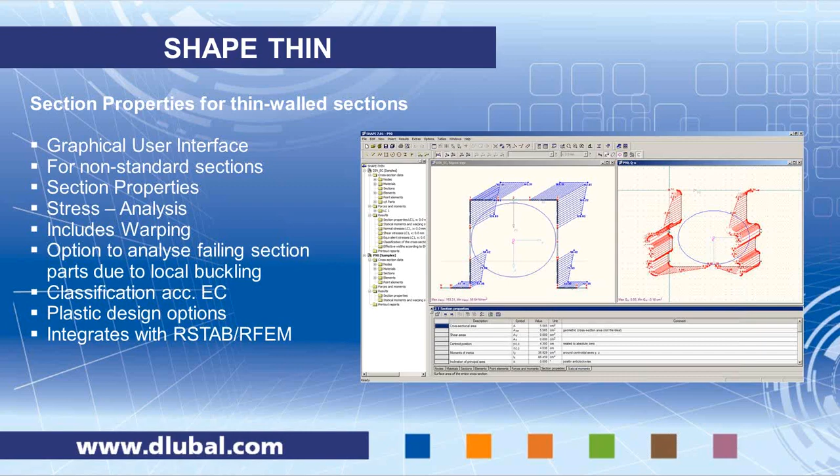It also comes with a classification according to Eurocode for general cross-sections, and it has plastic design options. It's also capable of importing internal forces from RSTAB or RFEM, or you can, as you like, manually enter some internal forces. We will see this module live, presented by Chelsea in a few minutes.

The second module that we are going to take a look at is RF-FE-LTB. It is meant to do buckling and lateral torsional buckling analysis according to second order theory. It's made from a 7 degree of freedom 1D finite element, which includes warping moments.

In general, you find in the codes procedures how to check for stability for standard sections, like an I-section, but once it comes to a general section, there are not many regulations that you can use.

In general, you have to use a program like RF-FE-LTB, where you can also set loads eccentrically, and that includes the 7th degree of freedom, the warping degree of freedom. With an imperfection and a second order theory analysis, and a stress analysis at the end, you can check for the allowable or limiting stress, and whether the critical load factor is smaller or larger than 1.

As I said, it works for all kinds of sections. It allows you to place loads eccentrically. Also, it has the option to stabilize the section eccentrically, so you can arrange a support or a spring along the top flange, for example. And it does stability and stress analysis. We will also take a look at this module live.

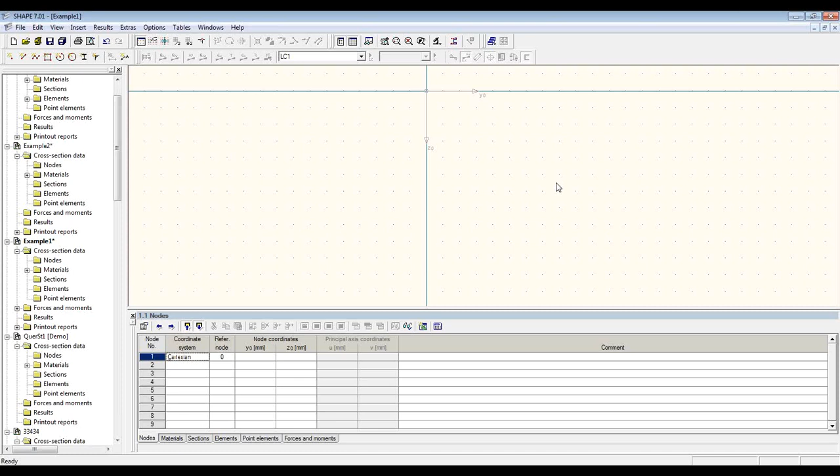The layout of the program is similar to RFEM in that you have a graphical window and workspace. Below that are tables. To the left here we have a navigator, and at the top there is a toolbar with several tools for modeling and also for displaying the results.

So in ShapeThin, when you are creating a new file, you have some options here in this dialog box. First, you define the name of the section, which is also the file name, and you can also add a description, which will appear in the heading of the printout report.

Below here, you can see some options for calculation. Here you can define if you would like plastic section properties to be determined. You can also perform plastic design, check limiting ratios according to DIN, and check or analyze effective cross-sections. To the right is an option where you can define the direction of the global coordinate axis.

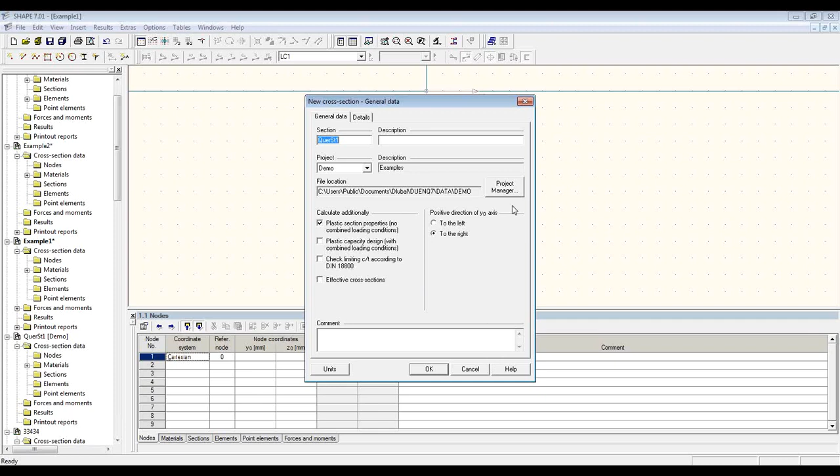Okay, one last thing before I start with my example, I'd like to take a quick look at the project manager. This comes with ShapeThin and is a nice way to quickly access and organize all of your files and previous sections that you've created. Here is a preview of my first example I will be creating, and here's a preview of the second one, so keep that in mind.

Getting started here, my first example will demonstrate one of the ways you can create sections in this program. I'll be making a built-up column section out of standard I sections and then modifying them. I will be creating an opening and modeling some welds.

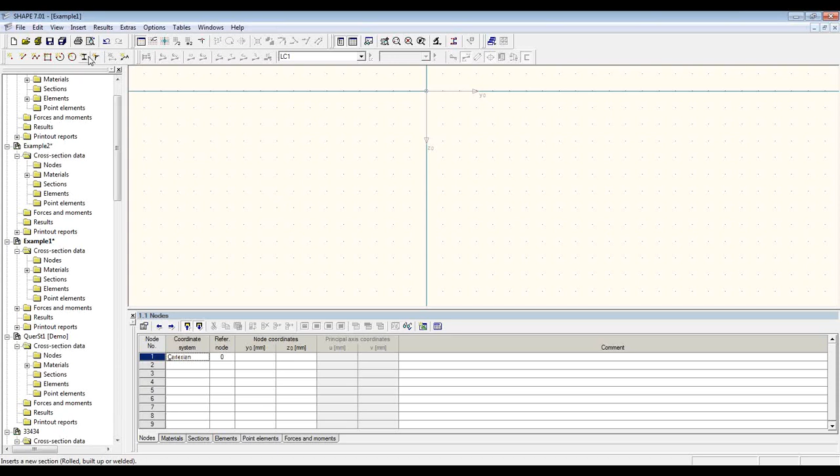First, I'll go ahead from the toolbar and open up the cross-section library, and here I can choose my I section for the first part of this. I'm going to take an IPE 500. This dialog box that appears is what facilitates placing the section. Since this is my first one, I can just go ahead and place it so that the top flange is at the center ordinate.

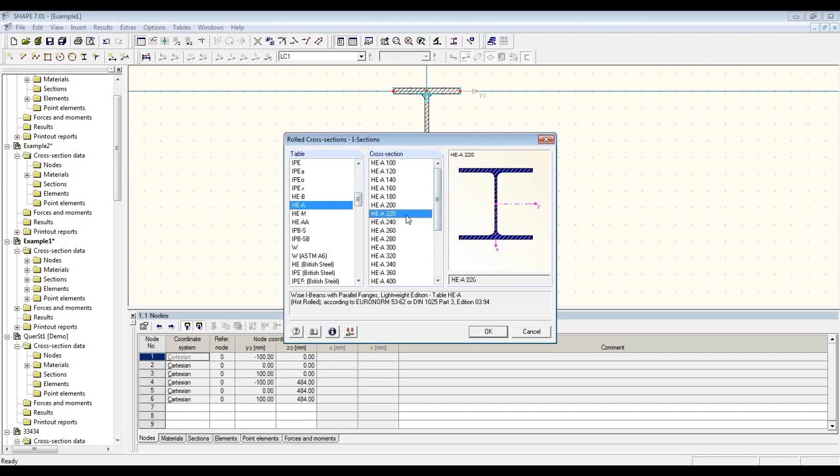Going back into my cross-section library, I can choose an HEA 220. Here I'll use this dialog box a little bit more. I want to define a rotation, as you saw from the preview — I'll have a rotated I section attached to the web. Here is where I define which part of the section I'm deciding my placement by. At the moment I have the center one selected, so if I go to the window and pick this node, the center will be placed there.

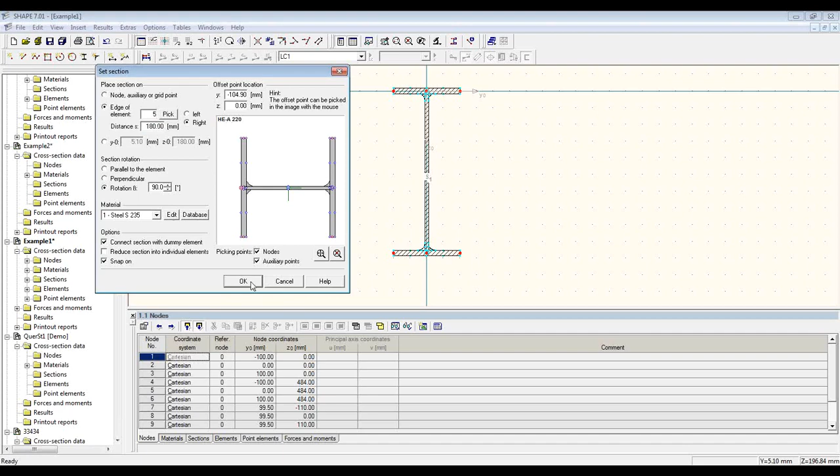So first I want to go in and choose the one on the left side, and then — one moment. Okay, I can go ahead and choose where it's going to be placed on the section that's already been placed. So here I pick the element on the edge on the right side, and you can see it's locked on the right side of the web here. I can place it anywhere, or select my distance from here. Okay, hit OK, and there I have it placed.

So now I have two standard sections that can be selected independently. If I would like to show the section details, I can go ahead and display them from this dialog box if you need to reference that at any point.

So as I said, I'd like to make some modifications and add an opening. In order to do that, I need to be able to select these parts individually. So if I make the selection of the entire element, right-click, and select Reduce Section into Elements — now I'll show you exactly, I have 5 elements and 4 point elements. So here I'll zoom in. You can see that each side of the flanges and the web each make their own element now independently, and the curved parts are point elements as well.

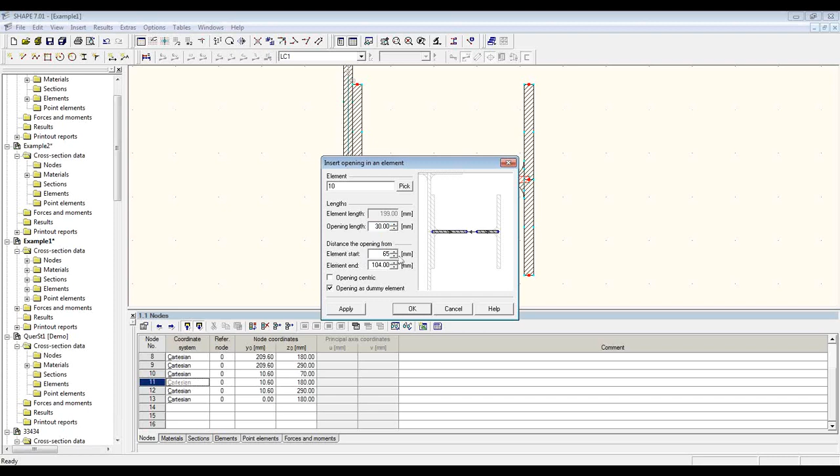So now I can select the web, right-click, and choose to insert an opening. Here I define my width of the opening — I want 30 millimeters — and its location. I want it to be 65 millimeters from the start of the element, which in this case is the right side. So apply, and I have an opening placed.

When an opening is defined, what is put in between is a rigid dummy element. For our calculation, we have a value called the effective thickness, which is for the shear transfer. The recommended assumed thickness is the average of the thicknesses of the neighboring elements. So in this case, the web here is 7 millimeters, so I'll make the effective thickness 7 millimeters.

Okay, so next I want to model a couple of welds at this connection point at the top and bottom. For that, I'll go back up to the toolbar and select a new point element. And this is ready to go.

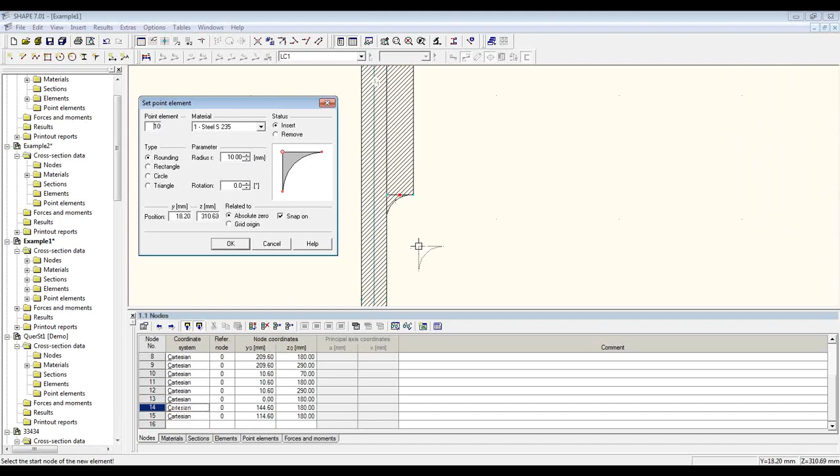I have my radius at 10 millimeters, and then I can just select which node I want to place it at, and there I have my weld. If I go up to the top, I can make a rotation of negative 90 degrees and place the top weld there. So now the area of this weld element will be included in the total cross-sectional area.

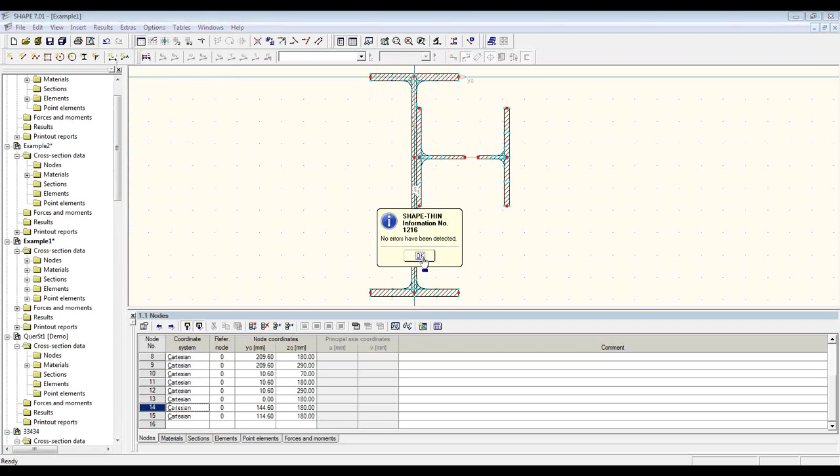At this point I have all of my section modeled. What I can do before my calculation is a quick plausibility check. This check will find if there are any errors, and if there are, it will tell you exactly what the problem is so you know what to fix. So, plausibility check - no errors were detected.

Now we're ready to run our calculation and get our results. The first table you see here is the section properties, a list of all the significant section properties that have been determined - your shear areas, cross-sectional area, position of the centroid, and so on.

You can define what is included in this list by using a filter here, and you can include even more properties as well. The next table available is the statical moments - this is the numerical results, and these results are also included in your graphical layout.

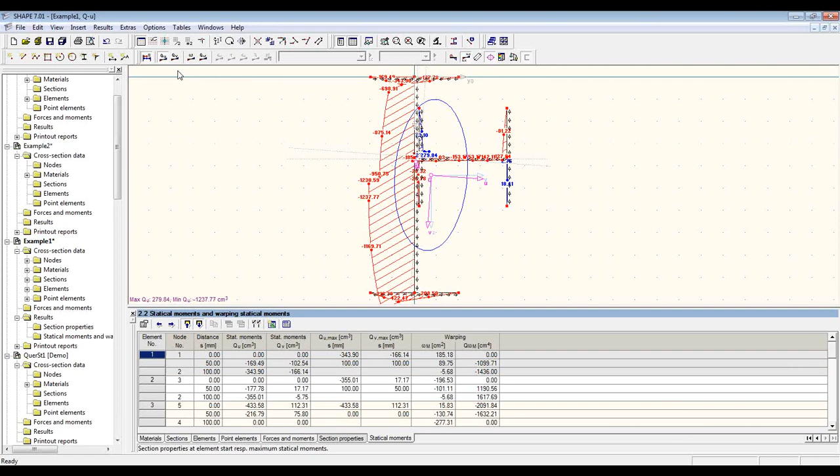So I'm going to turn this back on, and you can see the statical moments in both directions, your normalized warping ordinates, and your statical warping moment as well. One thing I'd also like to point out is that before you get to your results, you have a table for internal forces and moments, for if you want to perform a stress analysis.

These values can be imported directly from RSTAB or RFEM, or they can be manually placed. I'll go ahead and add a couple of load cases so you can see - at the 0x location, you can do it at multiple x locations.

I'll add a compression force of 80 kilonewtons, and then bending moments in both directions for the first load case. Then for my second load case, I'll add a smaller axial force and bending, in the opposite direction for my last bending.

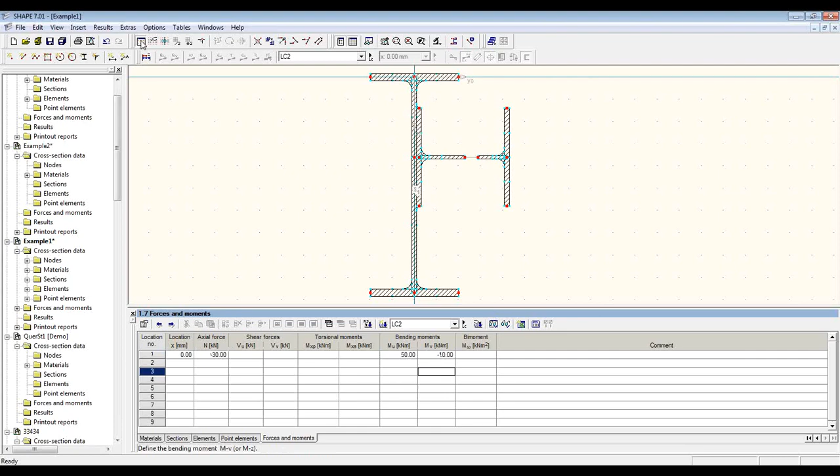Now when I run my calculation, a few more tables appear here at the bottom, and here you see the values both in tabular form and graphical distributions. So I have my normal stresses, my shear stresses - there are none here since I didn't have any shear forces - and also your equivalent stresses.

Going back to my graphic here, I can include these images of the results in my printout report if I'd like. So I'll go ahead and send a picture of the equivalent stresses to the printout report, and set it at 50% of the page.

And then send also the normal stresses, also at 50% of the page. And I'll open it with OK.

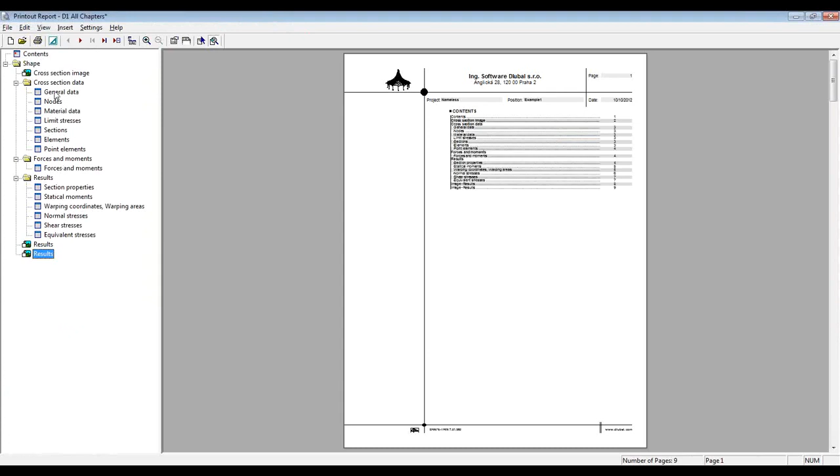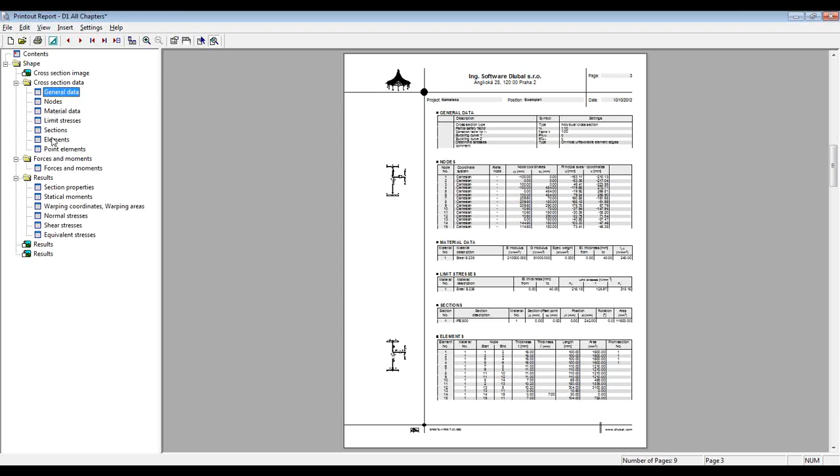Here we have our printout report, with the default setting. It has an image first, and then your tables of input data and also your results in the same order as they appear in the program. Below you can see the images that were included.

You can customize exactly what information you want to include in this dialog box, and reduce the amount of information that's included. Another nice feature of SHAPE-THIN is that for a quick summary of the section, your input data, and your section properties, there's an option to create a so-called short form printout.

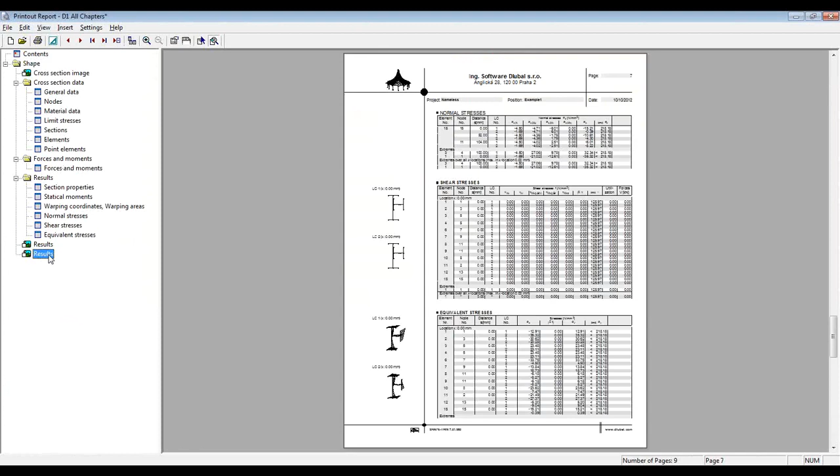This is usually one page and sent directly to the printer, but just to let you see what it is, I'll append it to the document I already have. So this is the page here - a one-page sheet with an image of whatever you have displayed at the time you send the print, and a table with your input data and then your section properties that have been calculated. That's nice to have.

Okay, so that's all for my first example. I'll go ahead and get started on my second example - if you remember from the quick preview I showed at the beginning, it's a symmetric section that will be used in a rain gutter system.

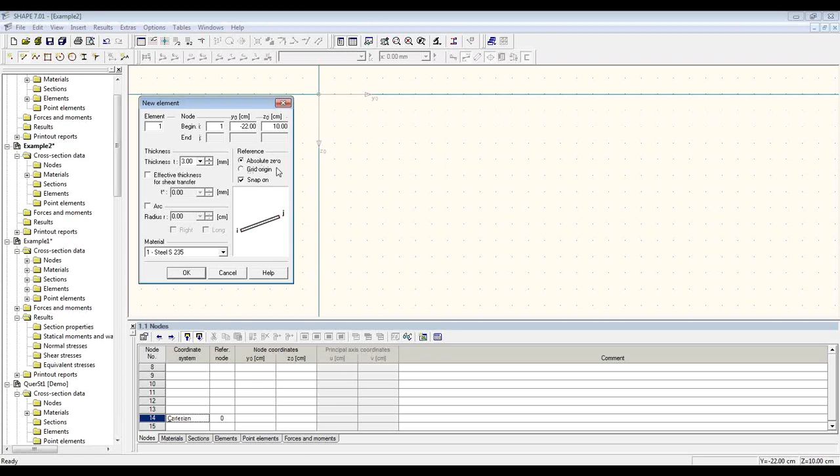For this, I will just draw it in manually using the element tools in the toolbar. To get started, here you define your grid, or your reference point in the grid. I'm working with a 2 centimeter grid spacing. Also define your thickness and material, and then you can just draw it into the grid.

My second line here, I want to be 5 centimeters, but because it's in between my grid spacing, it's easier to just type in 5 centimeters as the end node. I want to continue on from this node, but it's between the grid spacing, so what helps is adjusting my grid origin to be at this node. Now I can continue directly from here.

I want the height to be 16 centimeters, and the width of the trough to be 30. Because my reference is at absolute 0, if I change it to the grid origin, so now this is the 0 line for Y, I can go ahead and place it at 30.

Since it's symmetric, I can just do manually half and then make a copy of the rest over. First, I'd like to shorten this line from 4 centimeters to 3. A quick way to do that is to go into the table, find that line, and adjust the coordinate. Now it's shortened, and I'm ready to select and make a copy.

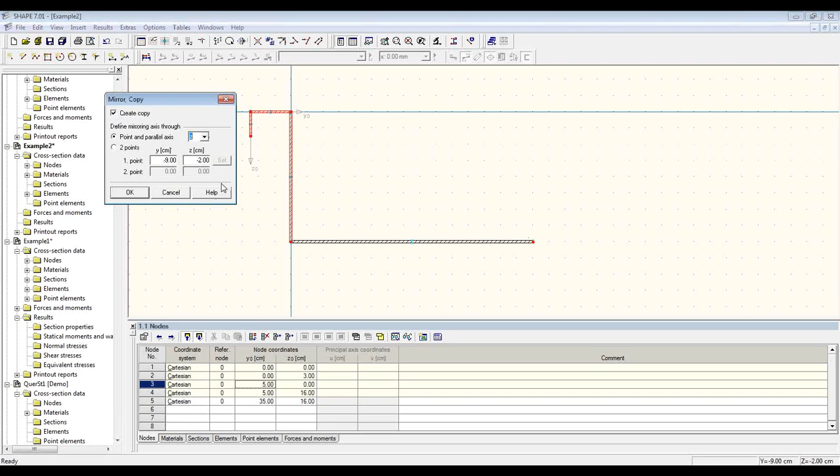Going to the toolbar, I have the mirror option. Create a copy through the Z axis, and select the center of this trough line that I have here. Just like that, I have my full section.

I can go ahead and run the calculation. First, I'll do a plausibility check to make sure I have all of my elements connecting. Everything is okay, and I can get my results.

You see right away, a table with the section properties, and your statical moments and warping constants there. Another thing nice to include in your documentation is dimensions, an image of the dimensioned section. I'll show you how you can do that quickly.

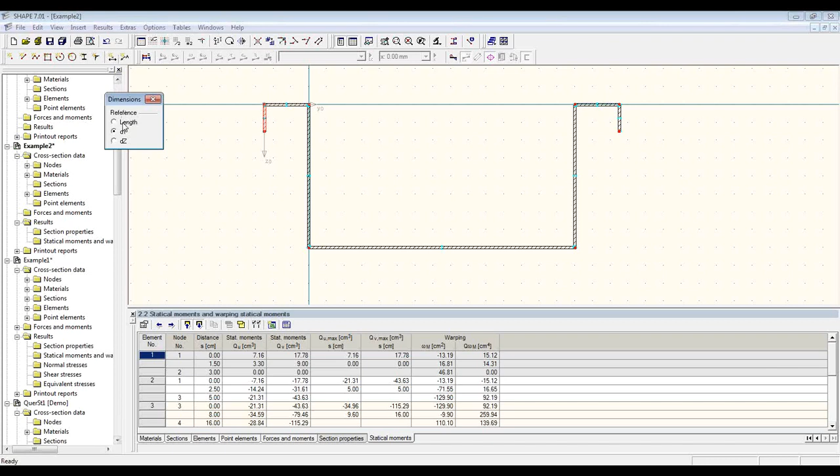I can turn off the view of my results and use the dimensioning tool here. Very quickly I can select to show the heights of these lines and also do the horizontal lines. This is also a nice way to quickly make sure you've made all your lines the right length.

Here you can see, if you check the table, I believe I made... everything is okay, so I think I just made a bad selection. I can't select this, but here we go. I just made a bad selection for the dimensions, so let me try that again. Yes, everything is okay.

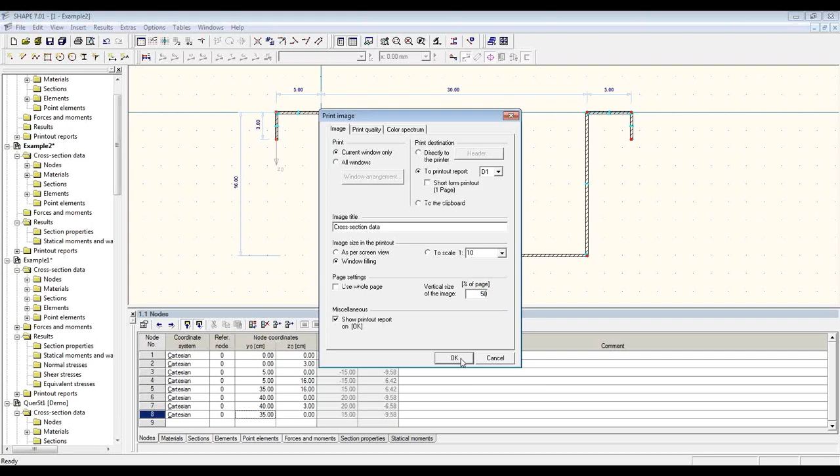As I said, this can be included in your documentation, so I can just send this, once again, to the report. 50% is a good size for this type of image. And there I have a dimensioned drawing of my section to include in the documentation.

So this is all I had to show you regarding a couple different ways in which you can model in ShapeThin. It's also possible to import a DXF file to use as a template, so this is what Walter will cover, and I'll save that for him.

Walter will also take you through a few more hints with working in ShapeThin and continue with the section on into RFEM and also present the module FE-LTB. So thank you very much for your attention, and I'll go ahead and let Walter continue from here.

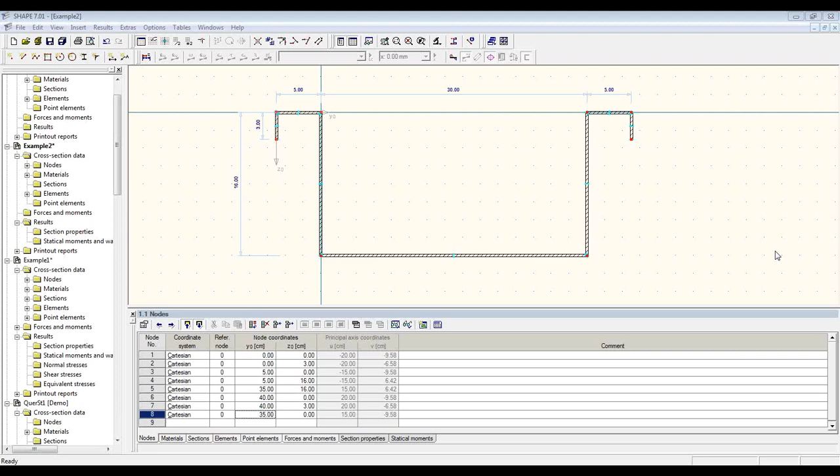What I'm going to do next is import a DXF template into a new ShapeThin model. Therefore, I open a new cross-section, name it with a number in this case, and stick with the default template. And I have here an empty file.

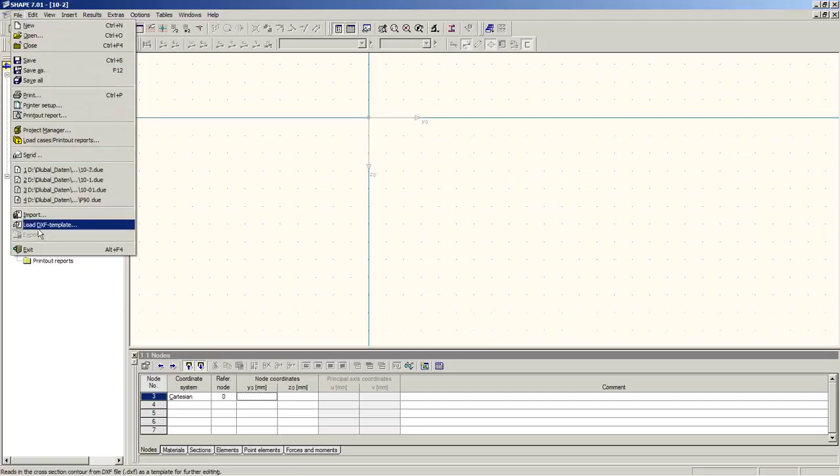The DXF template can be from any DXF file. You find those files typically from the makers of such sections on the internet. You can download CAD templates, and I used one of those from a cold-formed purlin maker and saved it as a DXF file. Once I import it, I get a small preview dialog. I can first of all show and hide the different layers.

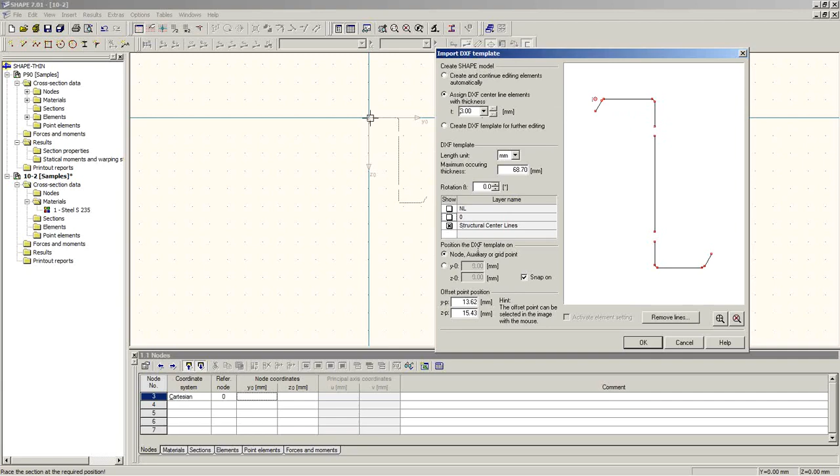In those DXF files, typically there are all kinds of lines, texts, and explanations, and you have the option to select a certain layer where the information you like is located. I can also automatically assign to this layer or those elements a thickness that I enter here in the text box, like 3 millimeters. After that, I can grab the template at the center point origin and drag and drop it into the main ShapeThin window, and with a mouse click I have my complete structure already generated.

What I see here also is I have so-called arc elements. If I double click on it, I see the radius of those elements and the thickness and so on. So it's just like a straight element, as Chelsea showed us, but there are also arc elements possible.

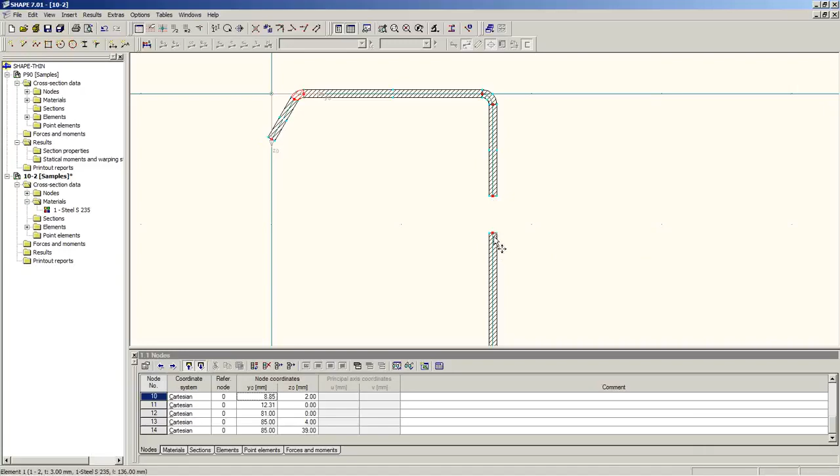Here in this model I had, there was an opening for bolts. Because I'm going to use this cross-section to model a three-dimensional or 1D beam, I don't want to have this opening along my beam, so I close it here, because bolt holes are typically only a local problem. I can just click and drag the nodes to the next connecting node and it will automatically connect.

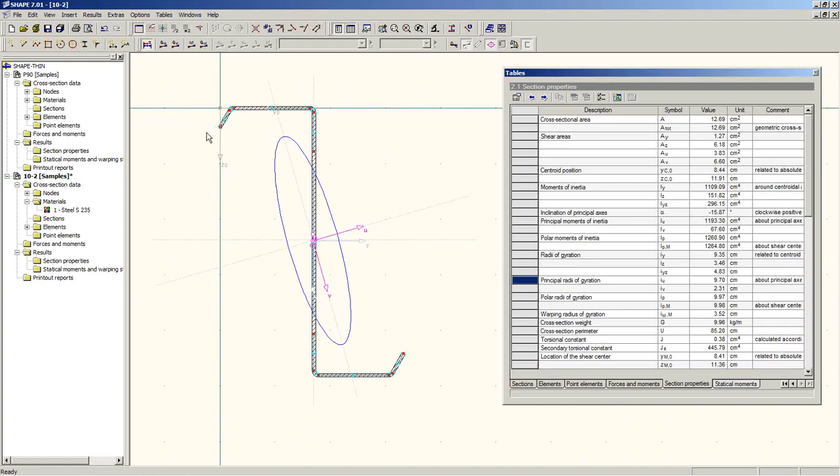My cross-section is then ready for analysis. I run the analysis and get the tabular information of the results, as Chelsea showed. Interesting for me are the section properties, and I can display them, for example, on the side of the window, and go through the graphical results by showing the different results here.

I notice here there's a little problem where I can close the tables - I don't like to see them here - where the flow of the diagram is not continuous. The sign of the result may depend on the orientation of the individual elements. So if that's the case, I can click on the element, right click, and use the command reverse direction. I do the same thing here because we had the same problem. If I analyze the structure again, now I see there's a continuous flow of the results and it forms a nice picture.

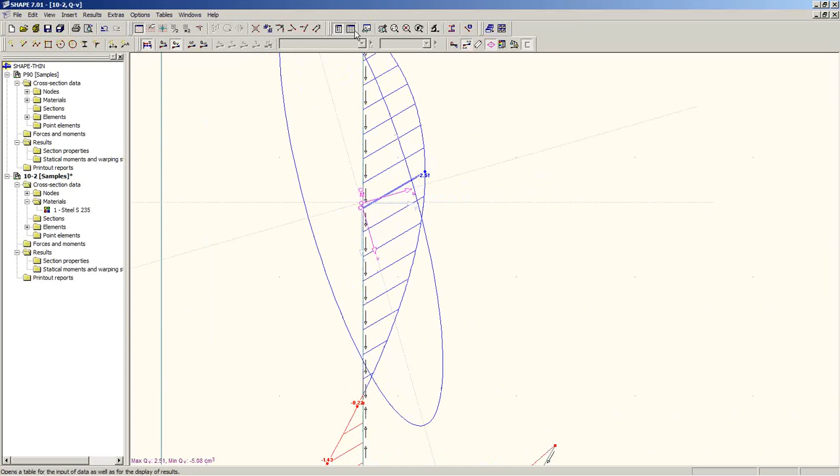With this I also get, for example, the rotation of the principal axis. If I want to know how big that angle is, I can show the table, and there should be the inclination of principal axis: minus 15.87 degrees. I save the result in the file 10-2.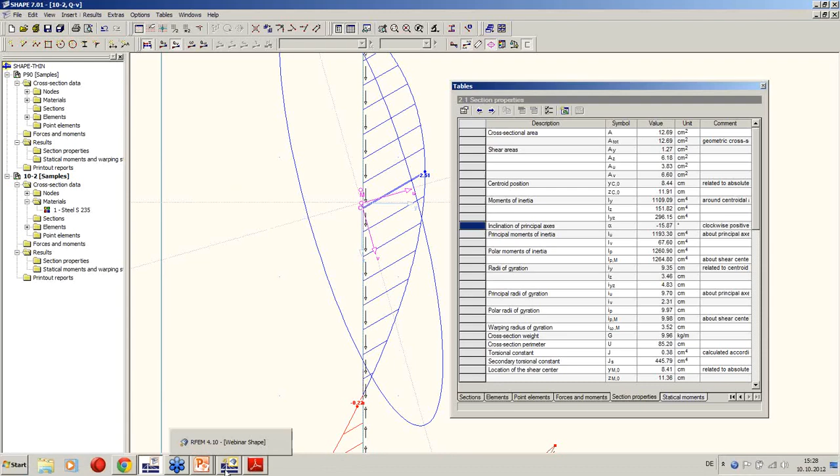I go to RFEM. In RFEM I will also create a new structure. What you see here is the final result of what I'm going to do now. It will be a 5-meter long beam with a linear load on top, and we will do an analysis of the critical load and show some tools you have inside RF-FE-LTB.

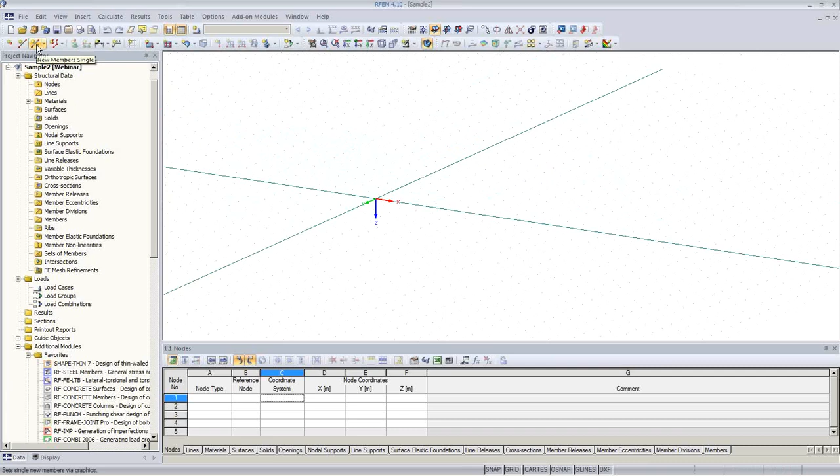We start a new structure inside RFEM, and I can call it sample 2 maybe. It's a 3D structure, and I can model it just as a regular structure that you might have seen in the previous webinars. I create a new member of type beam, and a new cross-section, choosing it from the library.

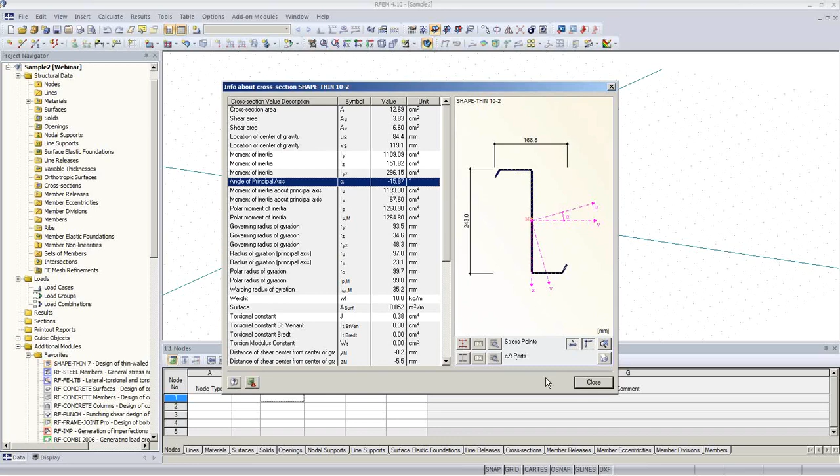In the library, if I go back one time and choose the library here, I see there are 2 buttons: cross-section programs, ShapeThin, and another one, ShapeMassive, which is for thick-walled cross-sections. I use ShapeThin here, and then I have the option to select my cross-section that I just made - it's 10-2. I can check the sectional properties, and all the parts are here, like a regular integrated RFEM section. Also the angle is there, so most likely I picked the right one.

Okay, material is steel. A couple more OKs, and then I can select the grid lines and enter the member - it's now 5 meters. A nice feature is that the rendering is just like a standard library section, giving a very good visual impression. If I don't want to see it because it's hiding too many other parts of the structure, I can turn the rendered mode on and off.

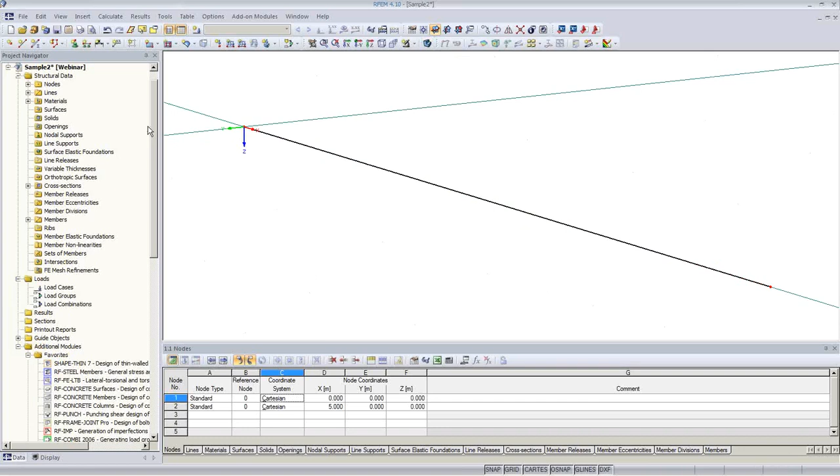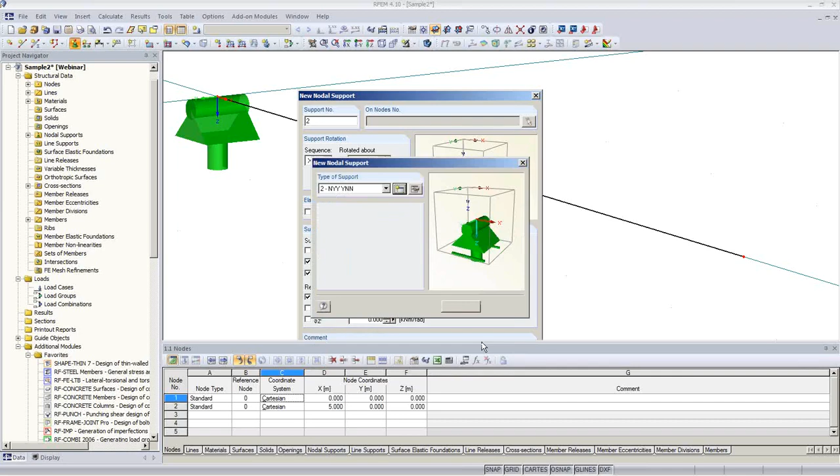I need some supports. I create a new nodal support and choose a support that is fixed in all 3 directions, with a restraint about the local longitudinal axis phi x. So, OK, I enter the first node support. I create another one and make it a fork type support again, but this time I release the fixation in UX direction, and again the restraint about phi-x.

So this will give me a correct support condition where I can analyze the structure.

Next, I will create a load case. I call it full load. I disable self-weight because I will add the self-weight as an external load. And I create a linear load, a new member load, global, related to the true member, and for now I choose 2 kilonewton per meter.

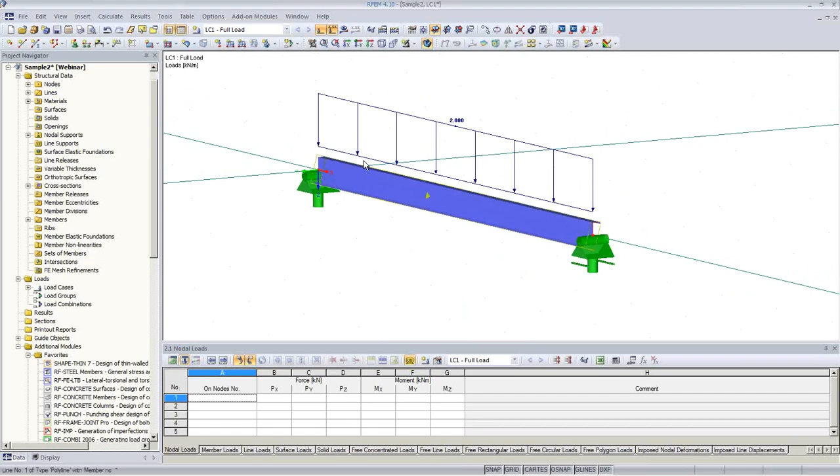With this I have a simple analytical system and I can run the analysis and I get my results. I get deformation because we have a non-symmetric cross-section. Deformation is not straight into direction Z. We also have bending moments in 2 directions.

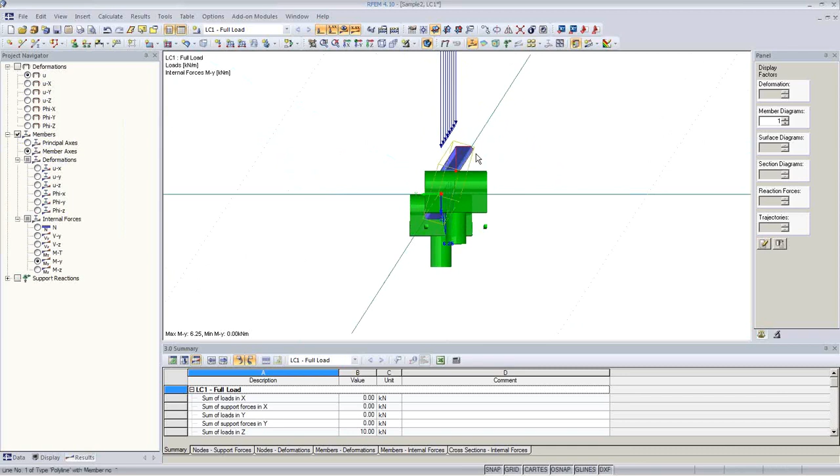So if I show this, we have MU and MV. I should point out that we now have the option in RFEM to use either the principal axis or the member axis for results. When we imported the shape thin cross section, it was automatically rotated so that the flanges were parallel to the main coordinate system. The main coordinate system is the global XY system, and the local XY system are in line by default, so I have to rotate it by the principal axis. But if I want to see the internal forces, I can switch them into both coordinate systems using these options here.

Next, I'm going to do a regular stress analysis with the steel member module for this beam, and I just want to run this load case. I have a utilization ratio of about 60%, and there is basically plain loading for this member. Also the governing internal forces, for the global axis it would be only MY and not MZ, but for the local, for the principal axis, of course, it has 2 bending moments. We have a utilization ratio of about 60%.

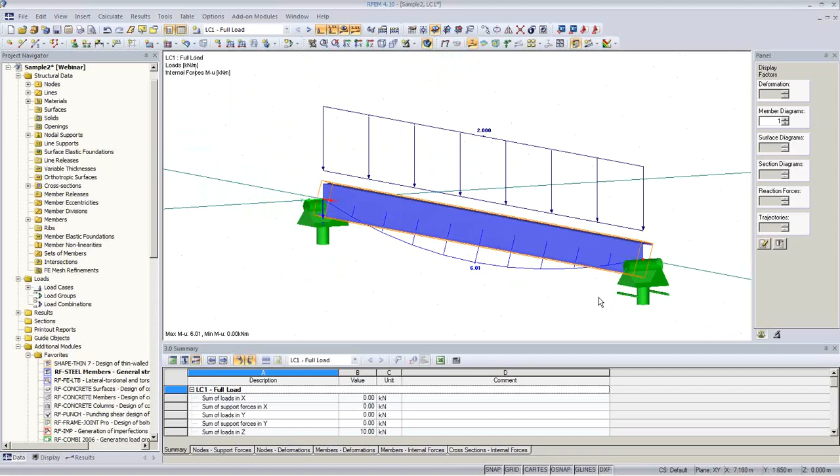Let's just remember this. Next, I'm going to SHAPE-THIN. Typically, if I have a larger structure with many beams, columns, many members, and I only want to do a design for a part of the structure, let's say one continuous beam, or a frame, or a column, it's not possible to do a three-dimensional analysis with a three-dimensional structure in RF-FE-LTB.

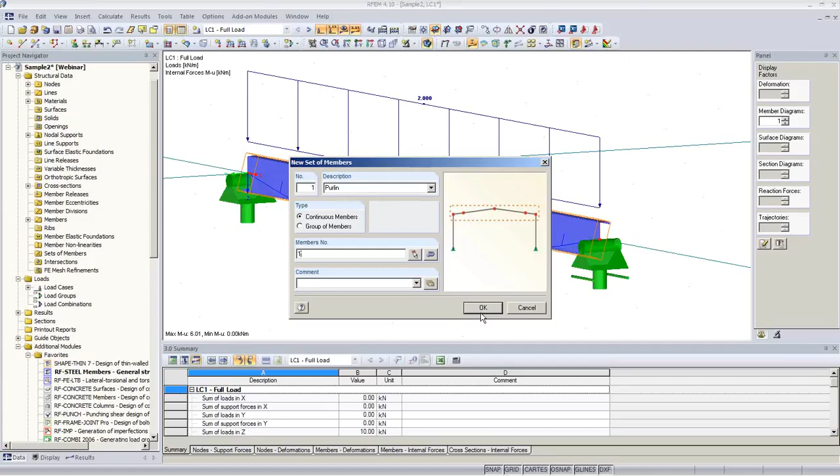So we have the issue that we have to isolate part of the structure from a global RFEM model into RF-FE-LTB. The way we do this is I create a so-called set of members, and with a set of members I can group one or several members into one set and give it a name. So basically I can combine, typically in a situation of linearly connected members, several linearly connected members into one set of members. Here I have only one member, so it's not so breathtaking, but I need this in order to work with RF-FE-LTB.

In RF-FE-LTB, I'm going to open it now. I can select those sets of members. Since I have only one, I can select all. It also automatically takes over the loads, so there's one load case, full load. It takes over the materials, the cross sections - I have all the information also here in this module. And the nodal supports, as long as they are defined in the RFEM model.

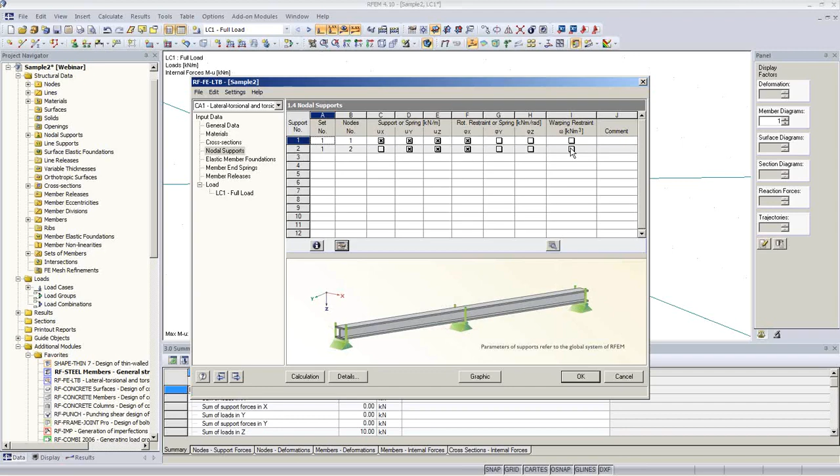And now I can adjust them and add to them, or complete them, because in RFEM or in RF-FE-LTB we also have the degree of freedom of warping, so there is also a warping restraint that I can address. The same thing is also with the elastic member foundation.

Here I have the option to add elastic restraints, and the special thing is I can give it an eccentricity. That means I can have a restraint on the top flange, on the bottom flange, or at one location along the beam. In RFEM itself, I only can have a restraint on a node, or if it's a linear support, on a line, but I cannot place it eccentrically.

Same thing with member end springs. On each member end, I can attach eccentric springs. For example, if I have only a discrete support somewhere along a continuous beam, I could do this. I also can have releases in such structures, and again I have the warping degree of freedom here.

The loads are also imported from RFEM. There are different load types we can use, different load distributions, and if you click here you have the option to pick from the offers here, load direction, and we have the 2 kilonewton per meter imported. Again, we have the option to have an eccentricity, and this is very important if you deal with stability problems.

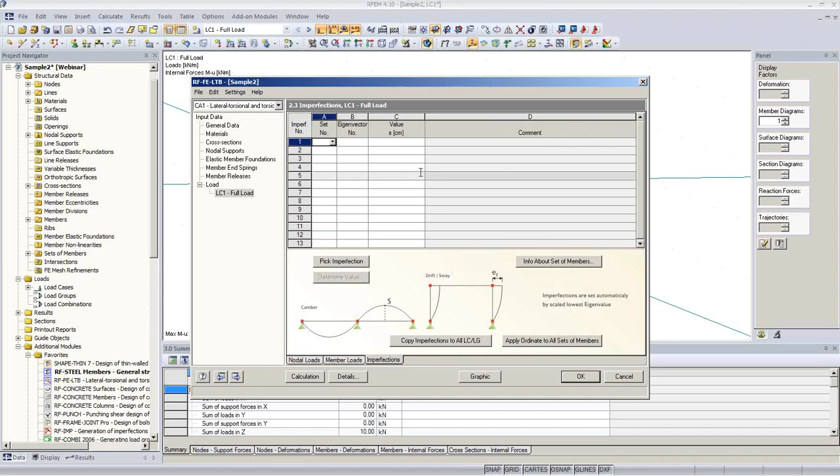I'd like to use the default settings and run the analysis. What we get here is, again, just as in RF-STEEL, a stress analysis. We have here axial stress, shear stress, and equivalent stress. And now we have also utilization ratio, and you see the difference in the calculation. We have here almost a utilization ratio of 1. And also as a result, we get here the critical load factor. We get 1.71 as the critical load factor.

If we want to have a stability check according to theory of second order, we need to have an imperfection, and we need to have a stress check with a utilization ratio smaller than 1, and we need a critical load factor that is bigger than 1. Then with this we can check for stability.

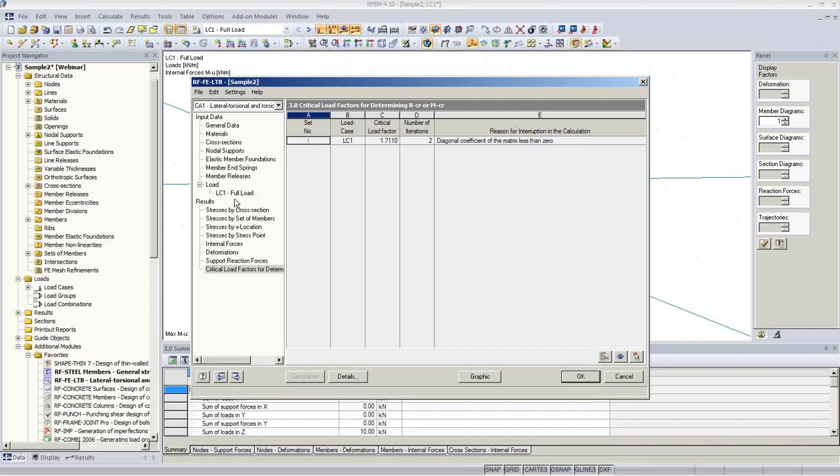So, without any changes from RFEM, I get those results. We can take a look at the graphical results. For example, here we can look at the deformation.

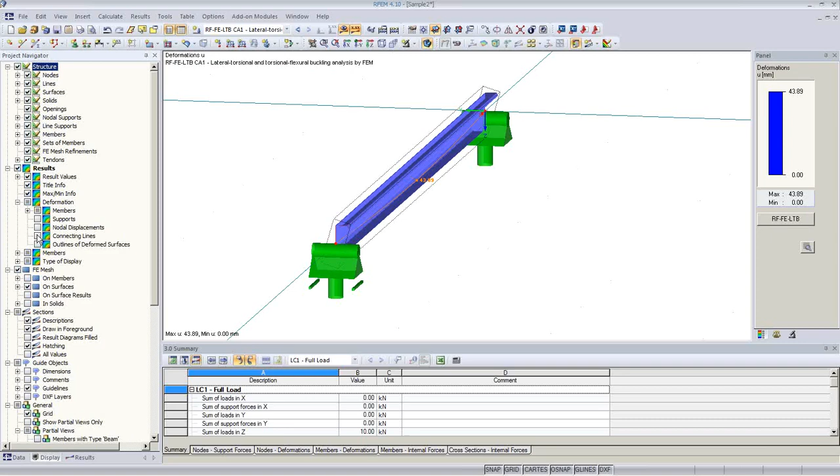We can show this a little bit better. If we go to the display tree and check here deformations, we can have here cross-section colored, and you get this nice display where we can also increase the deformation a little bit, and we see what happens to these cross sections.

So, because of the unsymmetry, it's a combination of horizontal and vertical deformation. You can see the top flange is moving sideways and causing all the other internal forces, of course. So we can also take a look at the results.

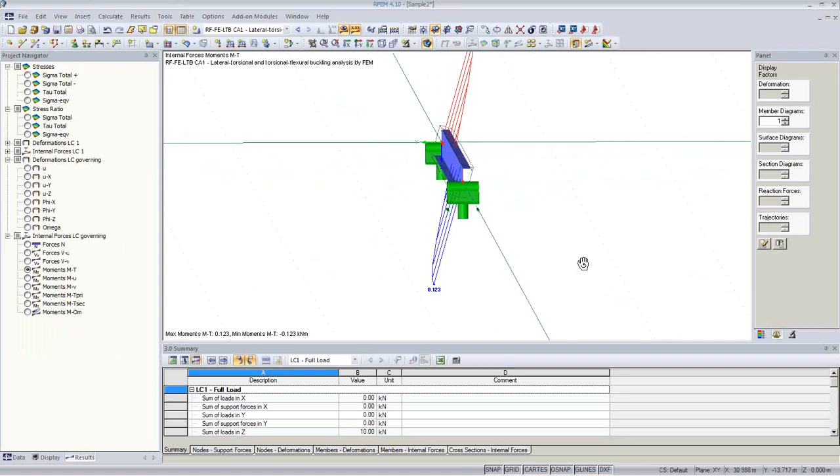So we have some small axial forces, we have the shear forces in both directions, we have also torsion that we don't have in RFEM, because in RFEM the crosswise loads are always in the shear center. So if we have only global loading, global load direction, there will be no torsion.

But in this module, our RF-FE-LTB, all those effects are implemented. We have primary and secondary torsion, which comes, and also we have a warping moment.

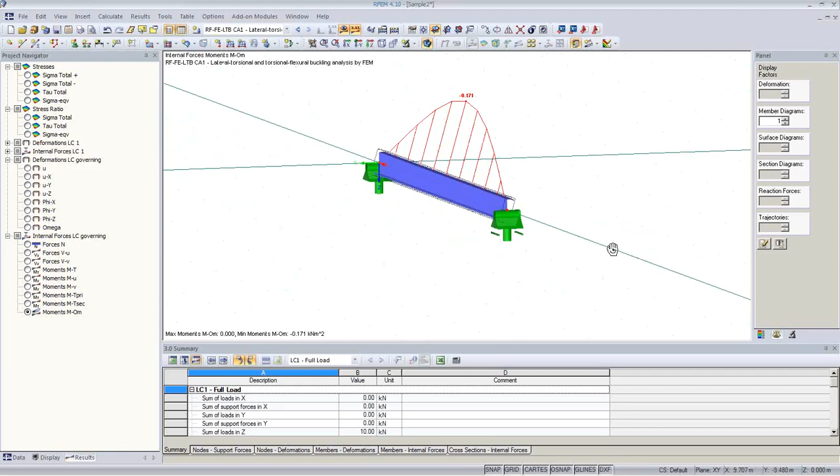Now we want to go back to our RF-FE-LTB and continue with our stability check. I'm going next, put the load eccentrically. So I put it on top because most typically the load is imposed on the top of the cross section via maybe a steel deck and so on. So if I pick the eccentricity, I know now exactly where my load application will take place.

If I run the analysis again, the eccentricity has a very negative effect. You see the stresses increase because the internal forces change, and also the critical load factor drops a little bit.

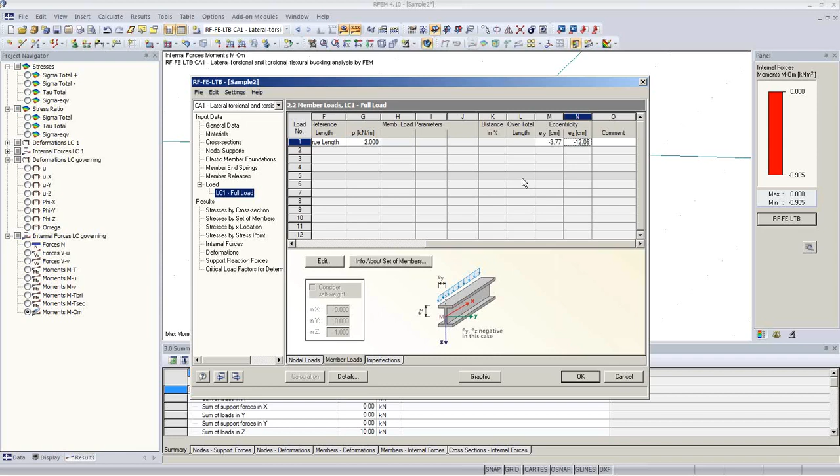Okay, what can I do now? We saw that the deformation was a combined deformation from rotation and horizontal movement. If I'm able to restrain this horizontal movement or this rotation, I will have a very good effect, I think. So this I'm trying to do now.

I'm going to the member elastic foundation. I select my first set of members, and now I can enter all the spring constants for those restraints and also the eccentricity, but typically I don't know those springs. So we implemented a tool that gives you the ability to calculate such springs.

In this tool you can select what type of restraint you have, whether it is a lateral or rotational restraint. Lateral restraints typically would be trapezoidal sheet. Of course, if you apply such restraints, you also have to make sure that, for example, the steel deck is able to handle those stabilization loads from the restraint.

I'd like to apply a rotational restraint this time from a trapezoidal sheet. I need to give the program information about the span of the support of the trapezoidal sheet and the length of the shear panel. I can either pick it.

If I have a building, I can pick 2 nodes. In this case I don't have, so I just assume maybe it's 20 meters. The beam spacing should be 1.5 meters.

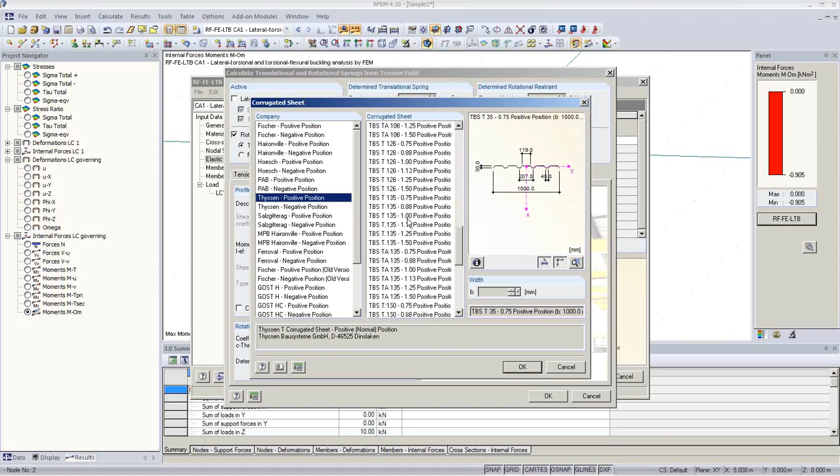The steel deck should be from a corrugated sheet, and I pick there — there comes a nice library from some provider, some steel deck, maybe something like this. Okay, all the parameters, effective stiffness of the steel deck are imported.

If it is a continuous beam type of mounting of the corrugated sheet, I can also take this into account. Also, the rotational restraint from a connection can be taken into account, and there's a table you can use from DIN that gives you some parameters depending on how many bolts you use to fix this steel deck.

So I say the bolt spacing should be such that bolts should be in every rib of the corrugated sheet.

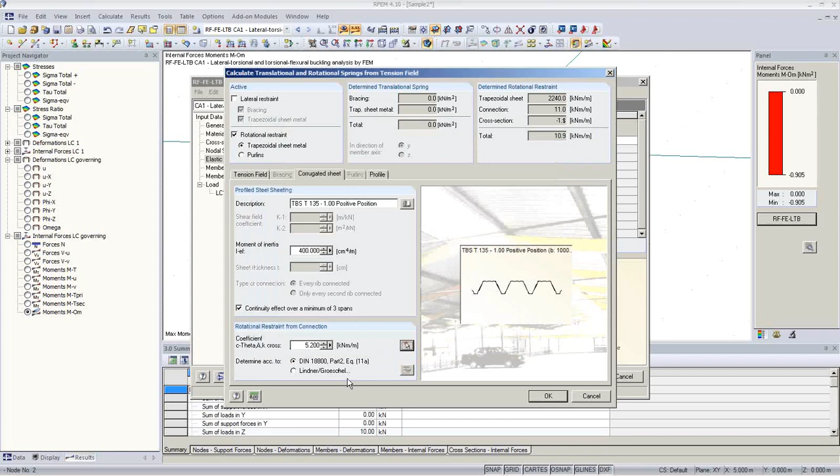Okay, and then the last part is the rotational stiffness of the cross section itself. There are also formulas that can be used, but they are only valid for I and channel sections, and this time I just ignore them.

With this information, we analyze the spring constant for a rotational spring, and it's already written in here in this input box. On OK, it will be transferred to the table here.

And next, I'm going to select the eccentricity and say okay, this rotational restraint should act on top of the cross-section as well.

Okay, if I do this and run the analysis again, you see we dropped quite a bit in the stress ratio. We're about the same value of 60% that we had from the regular steel module.

And also, if you take a look at the critical load factors, we see it's also dropped to 6.32.

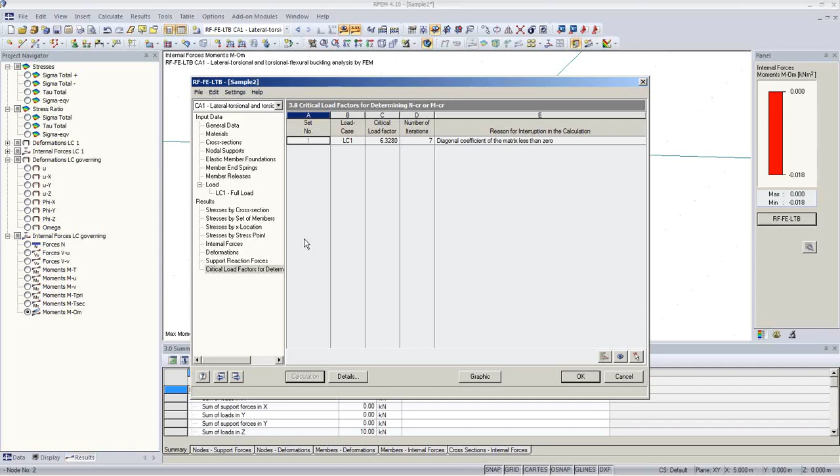To make the analysis of second order, stability analysis according to second order complete, we need to apply an imperfection. This is the last thing I'm going to do.

There's an imperfection tab that I can select. In this case, you might be able to find or know what the shape will be for an imperfection, whether it's cambering, sway, or inclination. But if it's a 3D frame structure, you might not know how the imperfection really looks.

It has to be according to the first buckling shape. In most codes it's regulated this way.

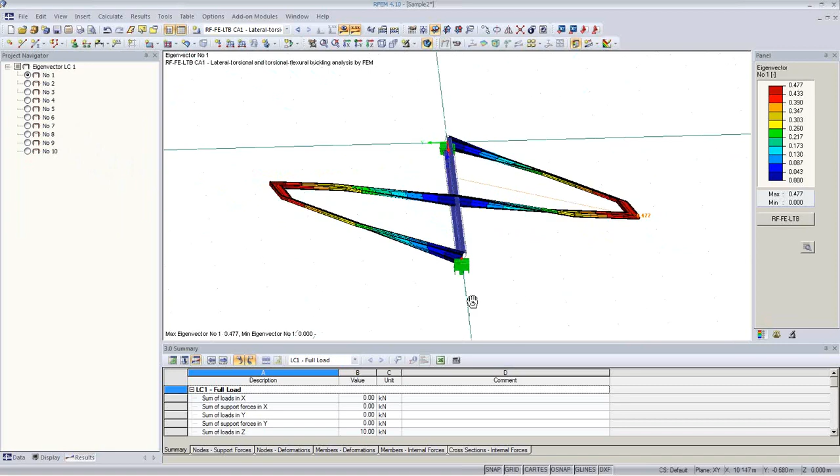RF-FE-LTB has the option to analyze several eigenvectors, and I can pick the imperfection graphically. That means I can analyze several eigenvectors, and I can take a look at them graphically.

If it's too much of a distortion, I can change them. I can change the magnification factor, and you can see here the typical failing modes of such a beam.

And I will choose, in this case, eigenvector number 2, which is the cambering that I want to have.

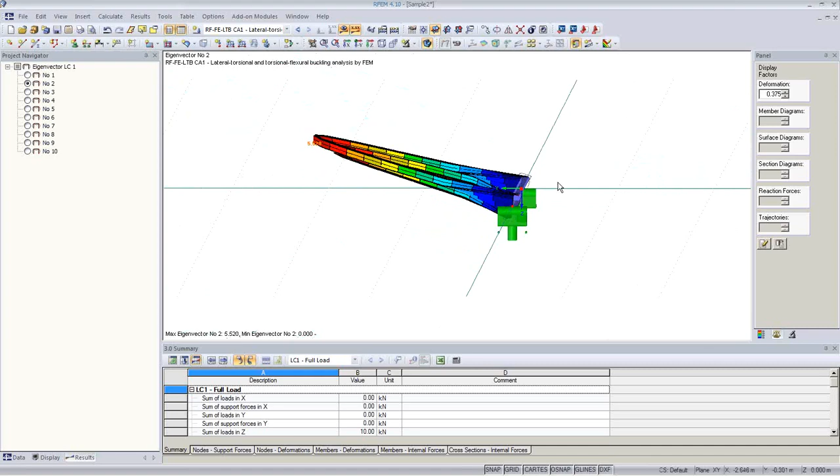And the horizontal part of this imperfection shape will be applied then to the structure. So I have this graphical view, which is very important to see what type of imperfection I'm selecting.

I go back to RF-FE-LTB, and now I need the scaling value for this imperfection. I need to have the pitch value basically of the imperfection.

Typically it is length divided by 200. So in this case it would be 2.5 centimeters. There might be different values you find in different codes, but Eurocode, for example, gives you hints in there.

With this imperfection, I run the analysis again, and I have again slightly higher stresses, and my critical load factor may be increased a little bit from 6.22 to 6.28.

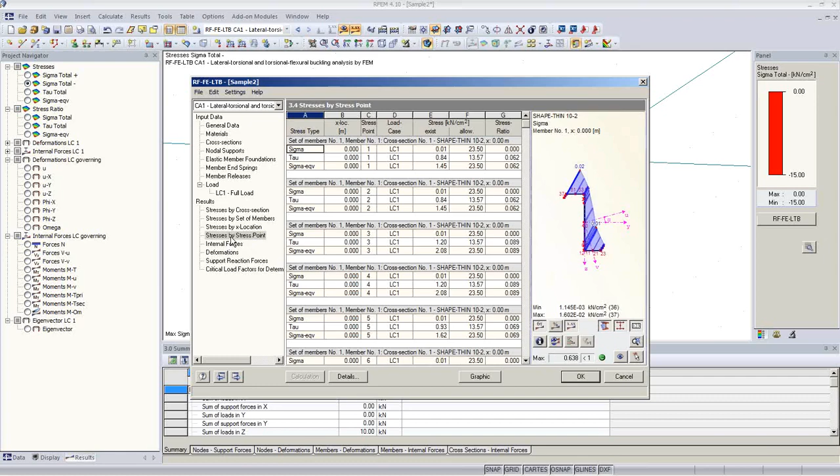But after all, my stress check is okay, critical load factor is greater than 1, and all my results are fine. You see here there's different tables, stresses by cross-section, set of member X location, internal forces.

So you can check all your structures, you get the deformations in numerical way, you get your rotation values here. You also have the support reactions.

Also, for example, a good piece of information is the twisting moment at the end from the imperfection, for example, that might be necessary to be taken over by the supporting structure for this purlin.

We can take a look at it also graphically. We have in our RF-FE-LTB a different navigator for results, sigma total, sigma positive negative value, or the sigma equivalent value, and we can use the stress ratio.

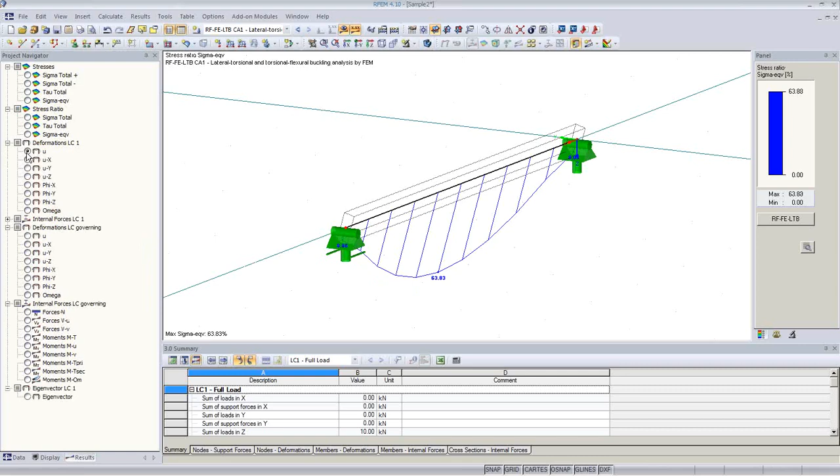So 63%. We can also show the deformations, and I can now show this again, and you can see this horizontal restraint due to our rotational spring is doing a good job, and it's helping to stabilize this structure.

Before we go over to some questions, I'd like to do some documentation of RF-FE-LTB. I print this structure, this figure here, to the protocol print. I want to do it window filling, and I want to have it on 50% of a page.

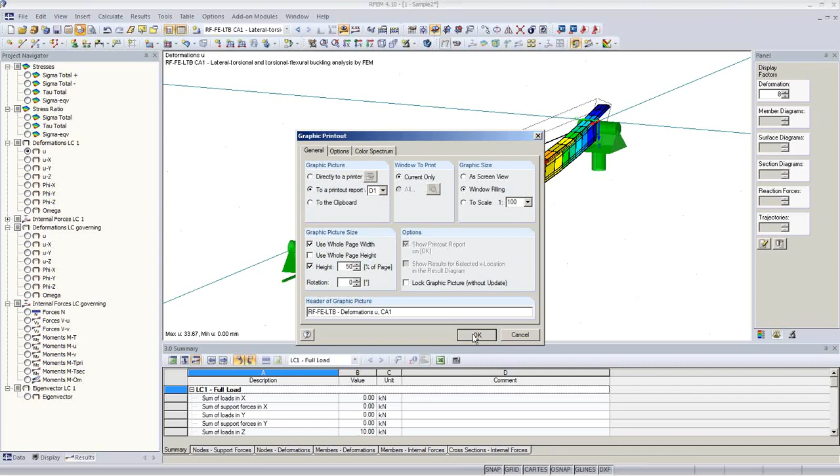And when I do it first, I have to open the printout report one time, and it gives me a chance to show you what is in there. So here we have this graphic.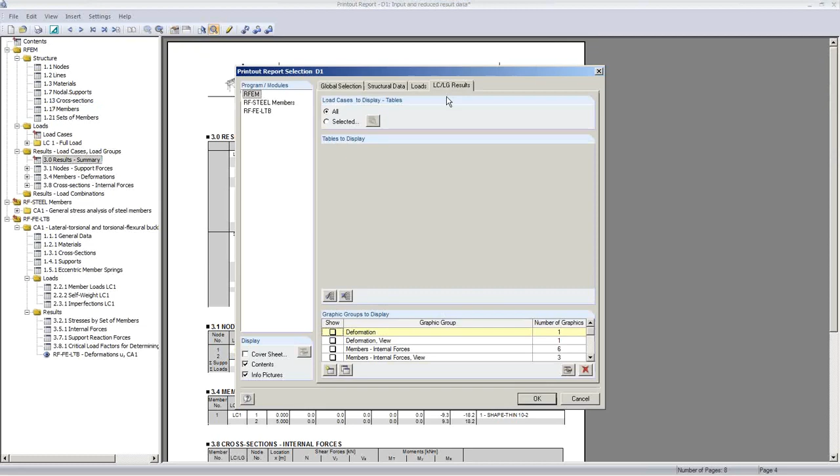RFEM has the regular tables here. You can flip through and zoom in, and select what you want in your printout report. There is an extra chapter for RF-FE-LTB that gives you all the results we just saw manually in the module itself, including eccentricities, stresses, and internal forces as tables.

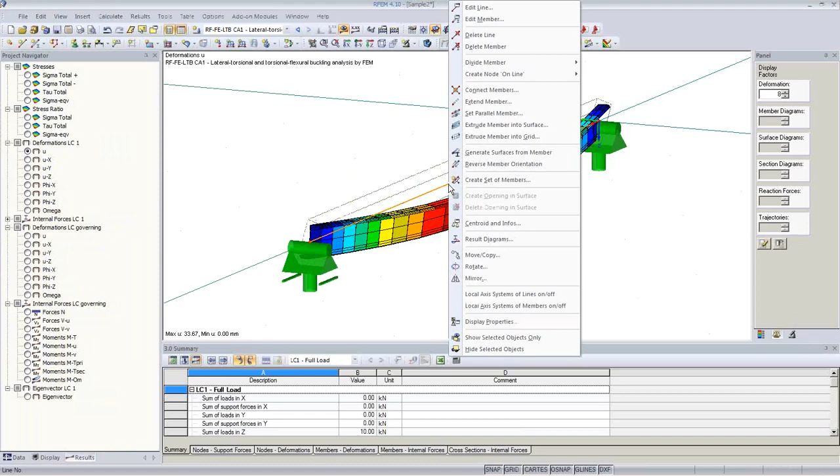There is one more nice thing I'd like to show you. You can right-click on the structure and get a result diagram. In the RF-FE-LTB results, you can check the equivalent stress, global deformation, internal forces N, shear forces, torsional moments, local primary and secondary bending moments, and so on, everything nicely arranged in one line under each other.

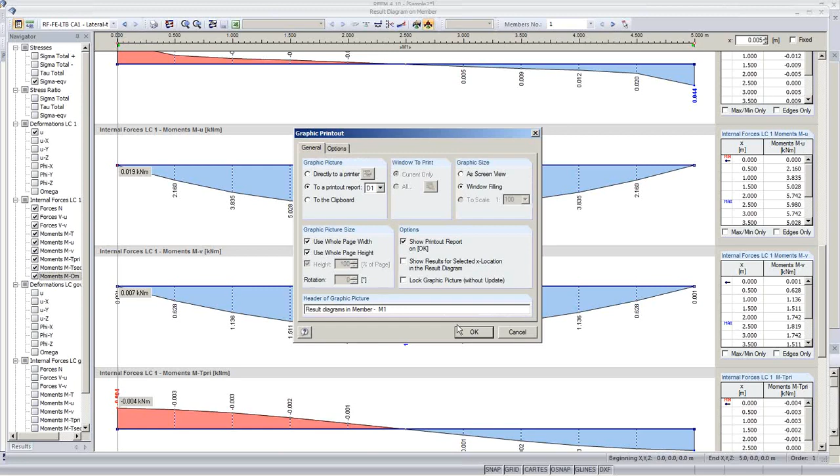You can scroll here if you like, and print this to the printout report. This is a nice document of all those internal forces, and you can check everything graphically in the printout report. Anytime something changes, the printout report is automatically updated, so it's always current.

Okay, this completes my presentation, and I think it's time now to take a look at some questions. And I see, let me read what is here.

Okay, it takes me a little bit because I have to first check out what is in there. Okay.

Okay, there is one. Well, there's one in German. I have to translate it.

One question is: what about the B to T relation of this thin structure, and how can we check this? It's a question related to ShapeThin. I'll go back to ShapeThin.

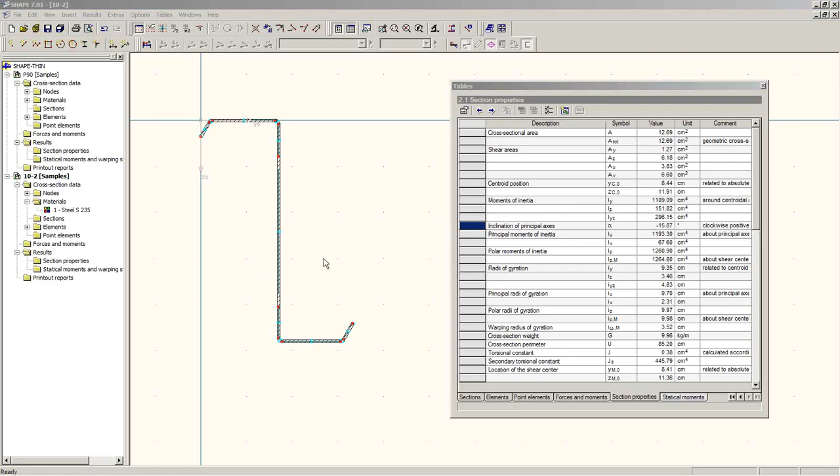You have the option to take a look at the width-to-thickness ratios only if you use a certain setting. I go to general data, and here you can check 'limit C to T values according to DIN.' If you go to the C to T parts, you can also check the rule: elastic, elastic-plastic, plastic. I'll either do this or just leave it here.

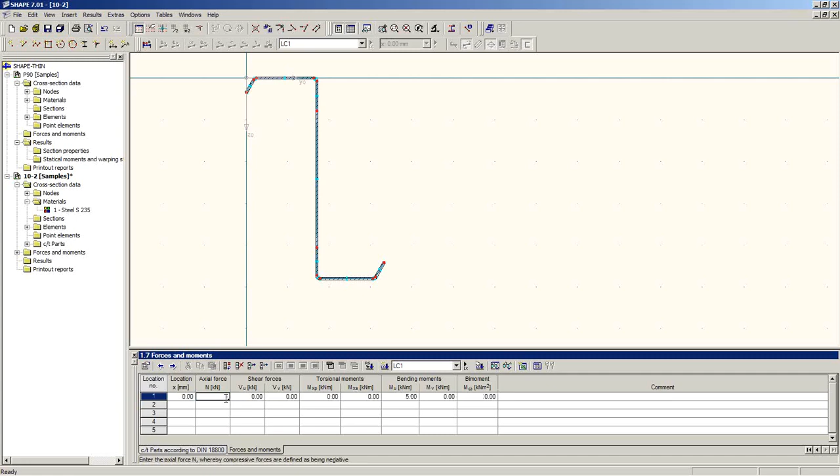I run the analysis again and take a look at my tables. Of course, for this I need internal forces, so I check some internal forces, maybe a bending moment, and an axial load. If I run the analysis again, I get a C to T value check.

You see here, actually for each element, the restraint type, if it's supported at both sides. You see the stresses, and you see the allowable and the limiting C to T value and the utilization ratio, basically.

This is according to DIN, and it's also possible according to Eurocode, but it's a different setting: plastic effective cross sections.

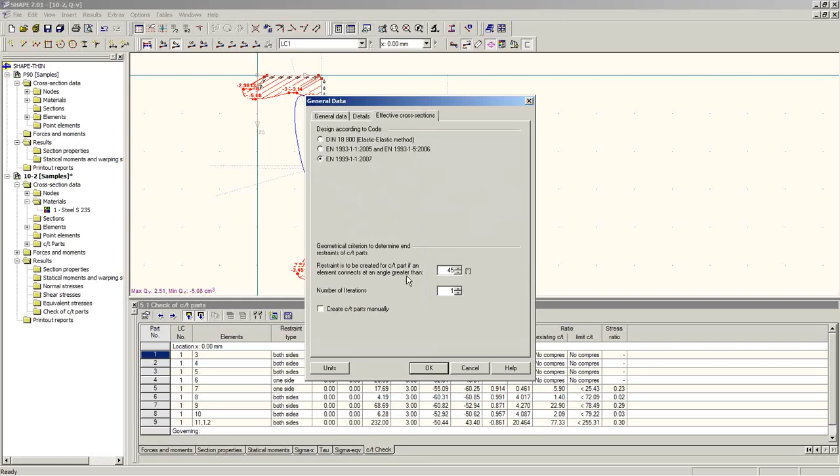Here we go. If I check the effective cross sections, then I can use, for example, Eurocode as well. I have here also the cross-section classification according to Eurocode. It leaves out the curved elements, because curved element classification is not part of Eurocode — we don't know how to do it, so it's a limitation.

But what you see here, the blue lines are the local buckling parts, and the support condition and so on is all here again. Then at the end you get a classification that we can take a look at.

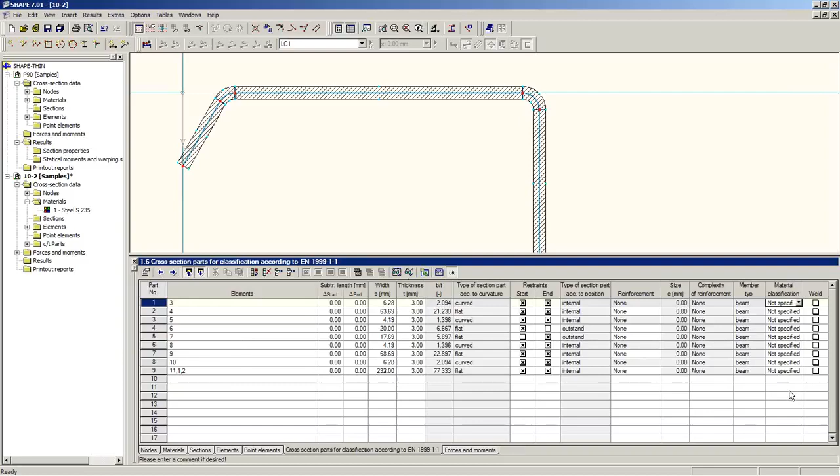Material — oh okay, the problem here is I didn't choose a Eurocode material, but if we had, I would have gotten a classification for Eurocode as well, and it's possible to do this classification in Eurocode. I'll send you this picture with the classification, or maybe I can use another file.

Hang on, there is one typical case here. It's a head section, according to Eurocode, and we use the effective cross-sections method, which you can set here. In this case, we can take a look at the C to T values for each element, and we have classification here.

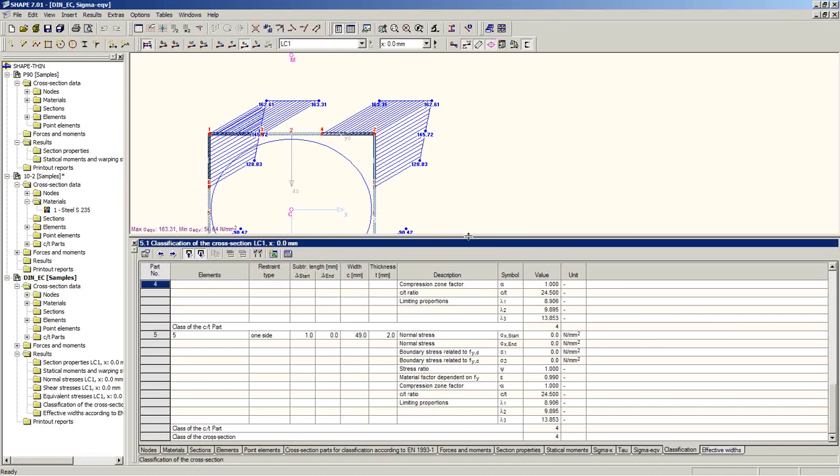In this classification, we get results for all the parts, for each element. If I click here, for example, it jumps right away to the right table. You get the c/t ratio, all the internal parts, and the final class. So if it's class 4, the class of the cross-section will also be class 4. And if I work with effective width, I get a stress analysis only with the effective width in this type of analysis. So I hope this question was answered.

Is it possible to make a database of sections? For example, a supplier has 20 types of profiles. Yes, you can do this. You create them inside ShapeThin, take them over to RFEM, and in RFEM, if you type them in the cross-section table, you will be able to read this cross-section, you have to know how it's named, but it will automatically recognize this cross-section by typing it in here.

When I import the cross-section from ShapeThin, it automatically becomes part of the user-defined cross-section library in RFEM, and each cross-section is also stored inside the RFEM file. So if you send an RFEM file with a ShapeThin cross-section, it will also be there for the user in the other RFEM license. Okay, this was this question.

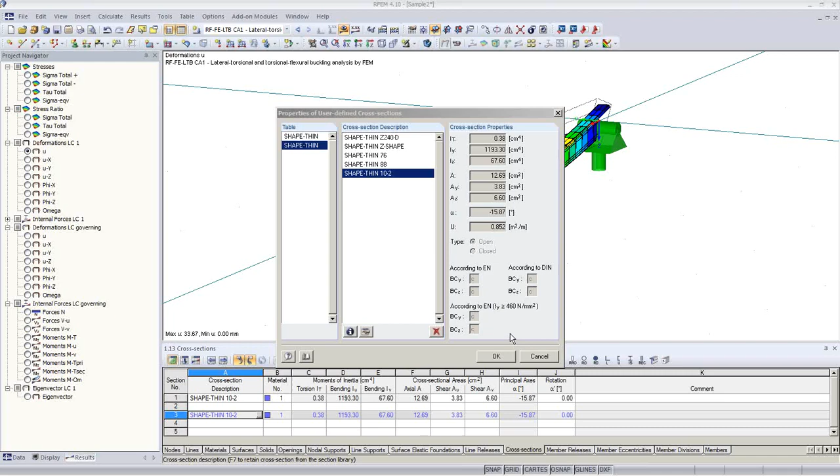Printing to an RTF file. Typically, you can export each protocol to RTF. So I can go File, export to RTF file, or VC Master, there's another program that uses RTF files. You can export it to an RTF file and have basically a Word format, which is unformatted, and you can use it for any other purpose, change it and add your own headers and your own graphs as you like.

And of course, you can also copy and paste into this file. So for example, let me try it, I haven't tried it for a long time. File, export to RTF, position RTF. Maybe I'll put it to the desktop so I can find it quickly.

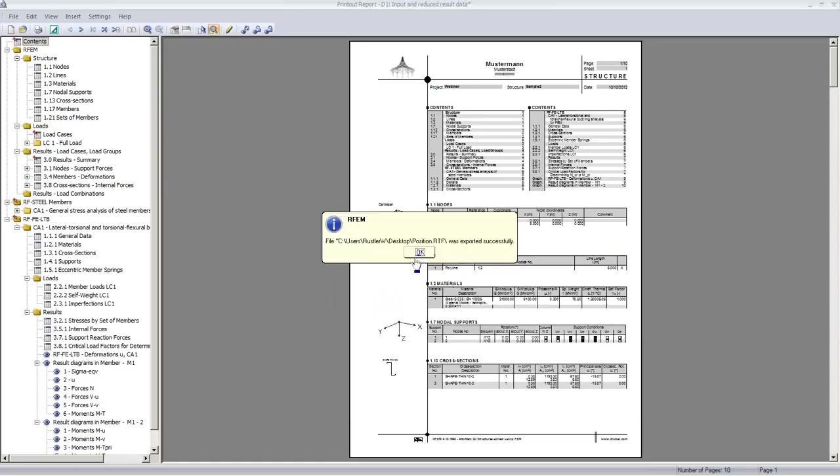Now there's a file, position RTF. I can open it in my Word, and I have here the tables all nicely arranged in my Word document.

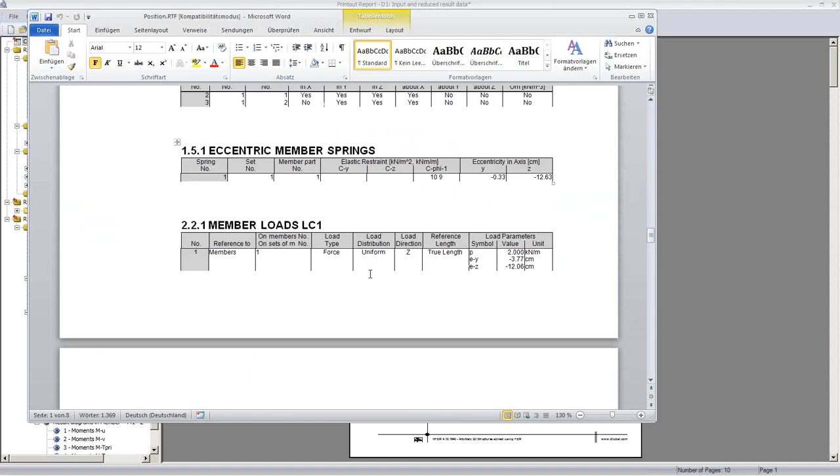And then you can enter your own header and your own things, and there should also be some graphics which you can use. Of course, you can also copy and paste any graphic that you have here. If you want to copy and paste those graphics, you can say Control C, and you can also say Control V, and you will have the graphic here, what you have on your screen, depending on the size of your workspace and so on. So it's all working like in any other Windows application.

Okay, let's see what else of questions we have.

There's another question whether we can have the effective width according to a German code called DAST 016. At this moment, it is not possible. There will be, of course, ongoing development with ShapeThin, and we will improve this. There is also a new version in work, with major improvements, we might have seen there's a little bit of difference in the user interface between ShapeThin and RFEM, and we'll also have the same user interface with RFEM, and that will be available, I would say, within the next year.